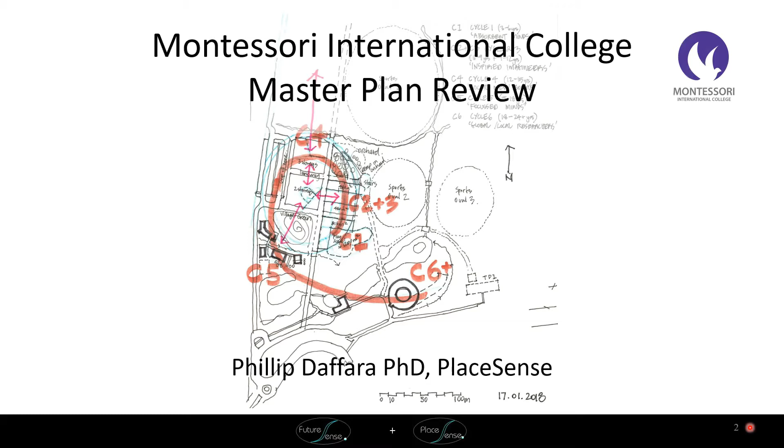The 2012 Campus Master Plan was generated in an organizational culture of survival, as the Montessori International College sought to relocate from its Sippy Downs site and establish a permanent home. This was a time of uncertainty.

Since the opening of the new campus in 2015, the college has experienced strong growth and a shift in organizational culture towards thrival. The 2012 Master Plan has already undergone 3 amendments with the Sunshine Coast Council to respond to short-term drivers of change.

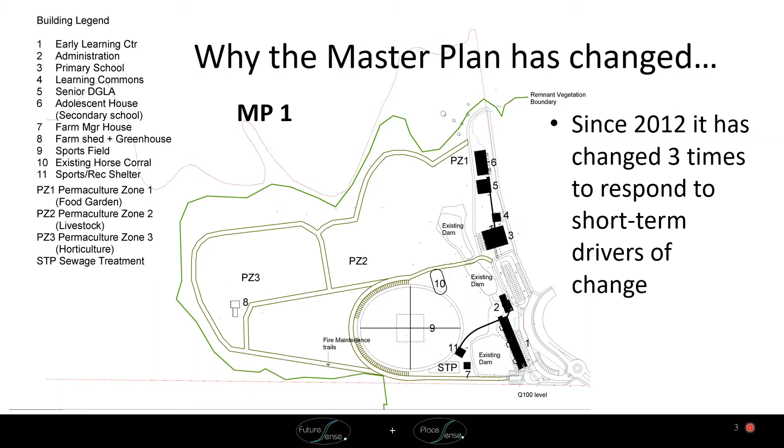Firstly, the plan changed in response to the projected traffic noise and higher than expected noise attenuation standards required by the Department of Transport and Main Roads in the development approval.

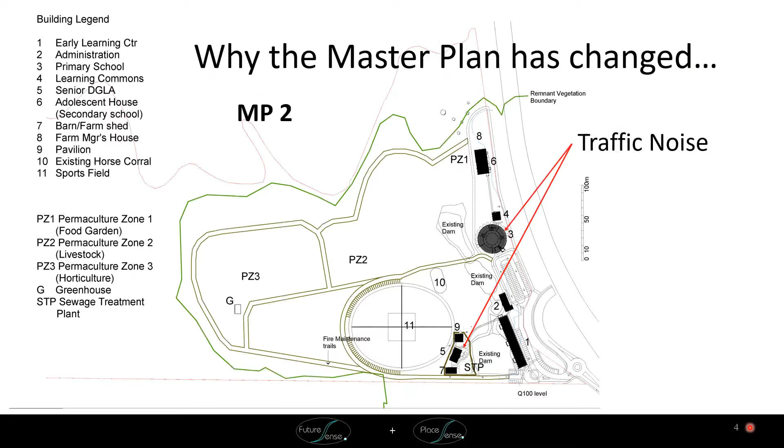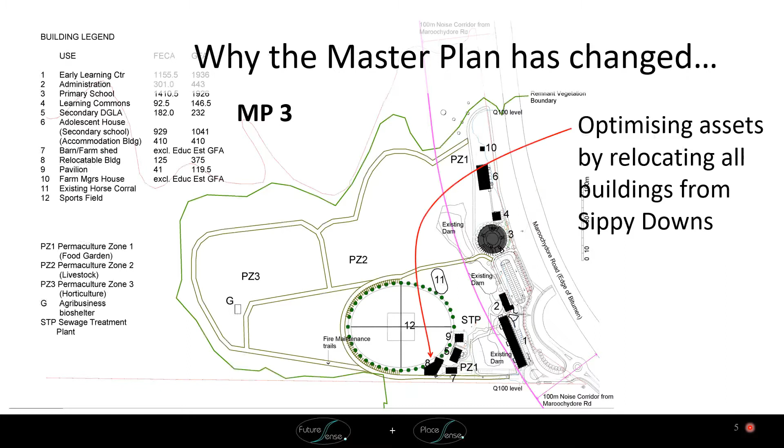Secondly, the plan changed to relocate another building from Sippy Downs, which originally was considered too expensive to shift. Thirdly, the plan changed to recognize the need for temporary demountable buildings to allow growth between permanent building stages.

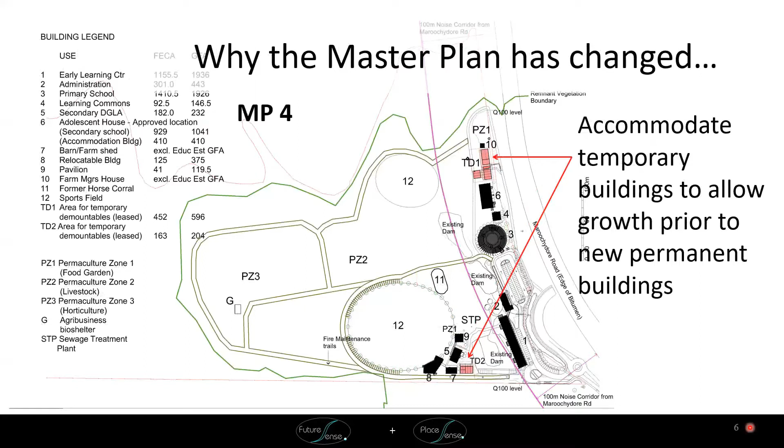The Montessori International College community renewed their vision, mission, and strategic plan in 2017, using visioning and foresight processes to recast their preferred future within the local and global education sector. The emerging vision for the campus is to become a mixed-use village of learners and community impact hub.

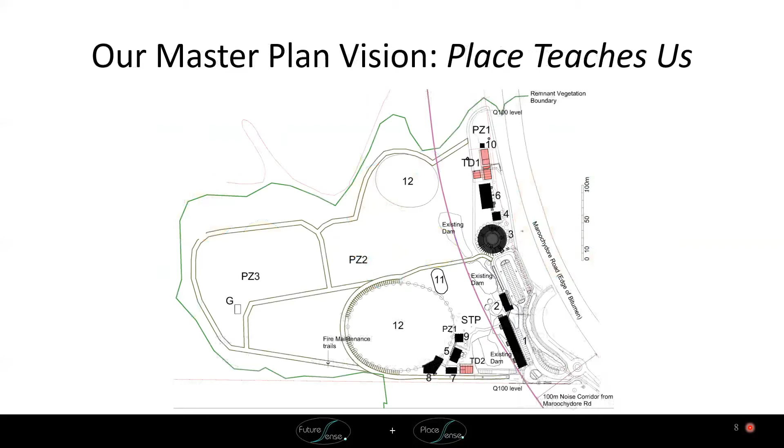As a result of the Futures Visioning workshop on the 27th of May 2017, a number of issues were raised that challenged the current master plan outcomes and what it means for the site. As a recap, here is the current master plan vision and place outcomes.

So our vision is that Montessori environments are beautifully designed and prepared to meet the specific needs of children and adolescents. Our places of learning teach us about the world we live in as we design solutions with nature.

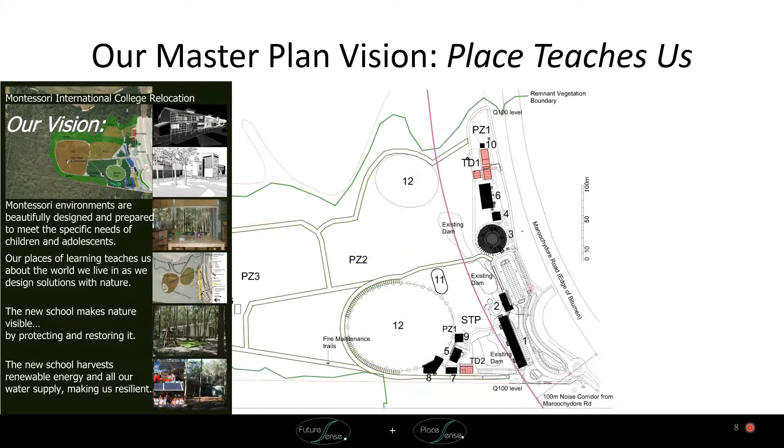The new school makes nature visible by protecting and restoring it. The new school harvests renewable energy and all our water supply, making us resilient. We will reuse buildings, saving materials and energy from Earth's limited resources. We use simple, natural, and healthy building materials.

We will plan and implement smart travel solutions to cut down trips to the school. And the college's adolescent community will manage an organic farm, keeping the land productive.

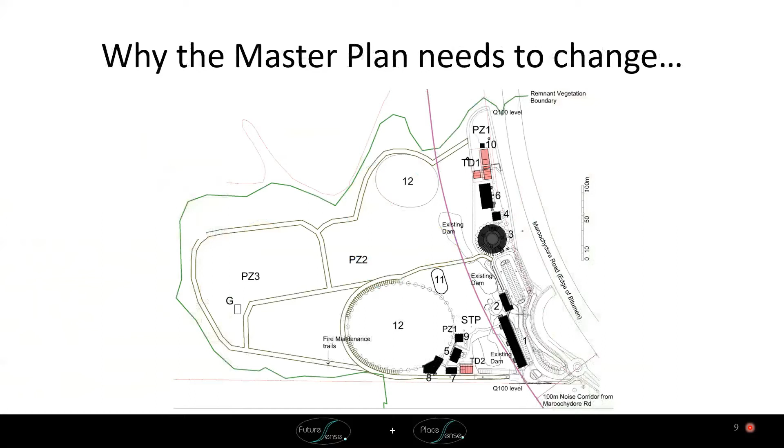A review of the existing master plan is required to ensure long-term strategic alignment between the organizational vision and place vision for the college, and to formulate the long-term design strategies to guide development for the next 20 to 40-year time horizon.

The new place outcomes include being a mixed-use village of learners, being self-sufficient, accommodating population growth, being a robust plan that can have a long life well into the next century, and being able to develop a green school away from the noise, back to the original principles we envisaged.

A small consultant team is reviewing the master plan, consisting of Diane Hayes, Damien McGarry, Ben Heaton, and Philip Daffara, working with Sheree Fitton and Grant Vero from the college executive.

The timeline for amending the master plan began in July 2017 with the generation of 3 development scenarios and the commencement of the issues analysis.

In January, we developed the draft master plan, and now we are sharing the draft master plan with the college community and asking for feedback, before the planning application to Council is lodged to amend the official plan.

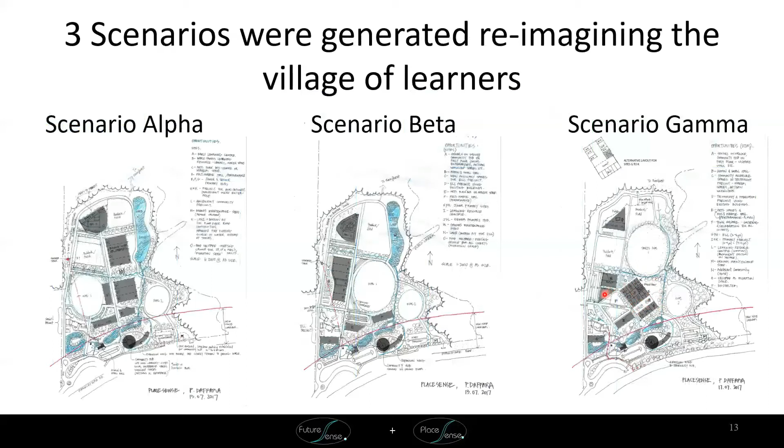The strengths, weaknesses, opportunities and threats analysis helped the consultant team and executive understand the impacts of the development scenarios. This video does not discuss all the impacts, but if you are interested, you may pause and read the SWOT tables for each scenario, or download a PDF of this presentation.

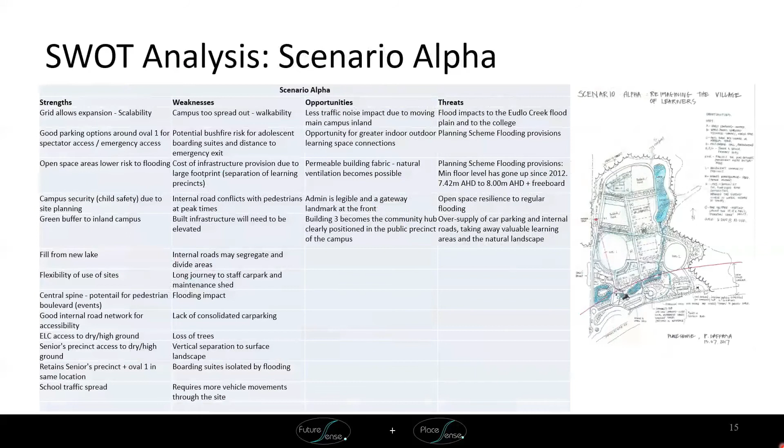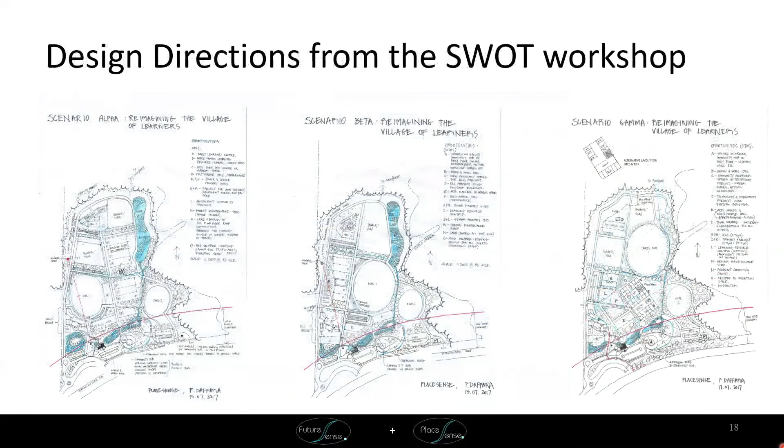The SWOT analysis of the three scenarios identified key development strategies and elements to be embodied in the new master plan.

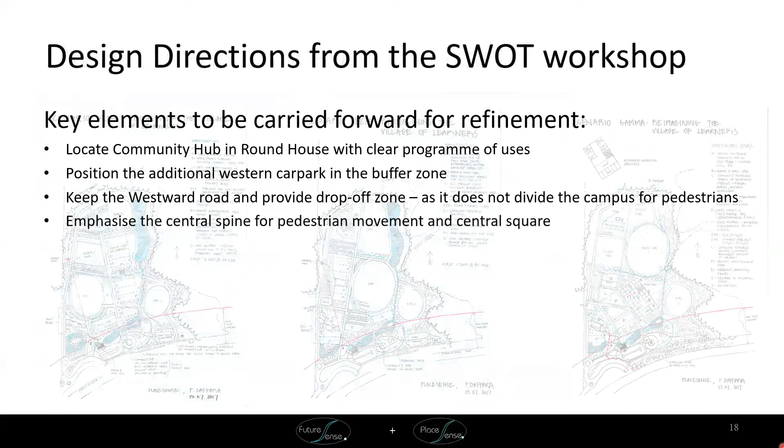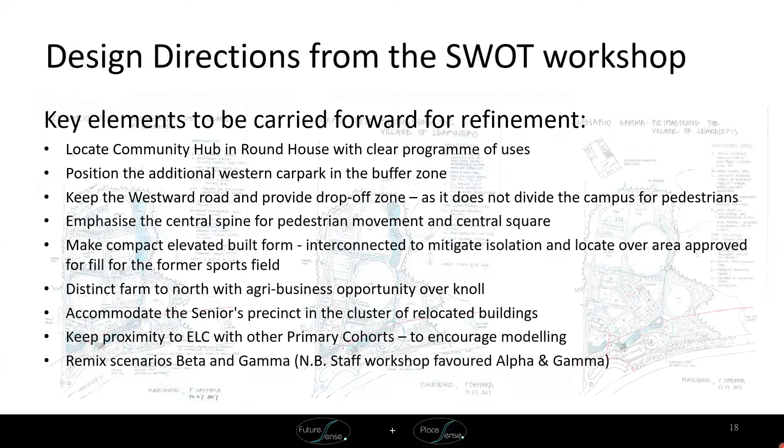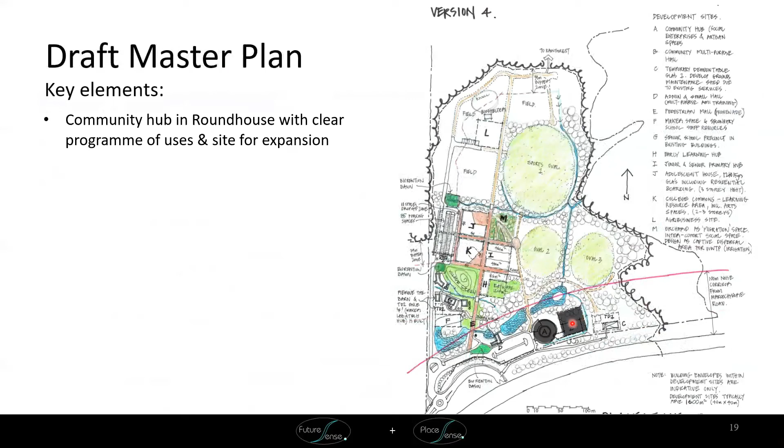So the key elements of the draft master plan include the community hub in the roundhouse with clear program of uses and a site for expansion. A westward road that does not divide the campus and provides a drop-off zone.

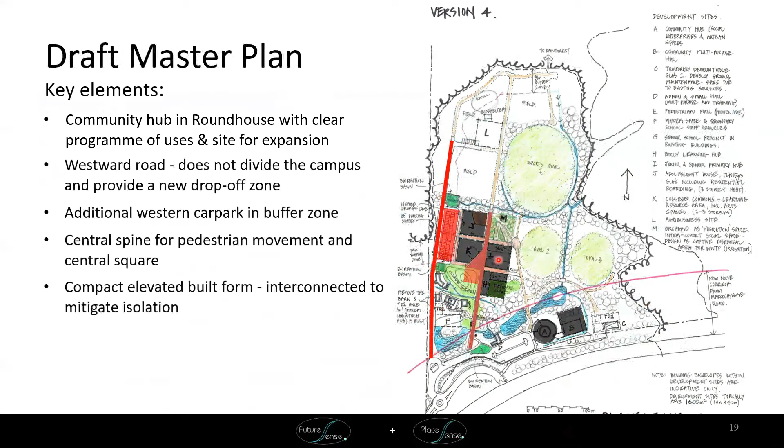Additional western car park in the buffer zone. A central spine for pedestrian movement and a central square and village green. Compact elevated form interconnected to mitigate isolation during flood events. And a distinct farm to the north with agribusiness opportunities over the knoll.

And the seniors precinct is accommodated in the cluster of relocated buildings with an expansion site.

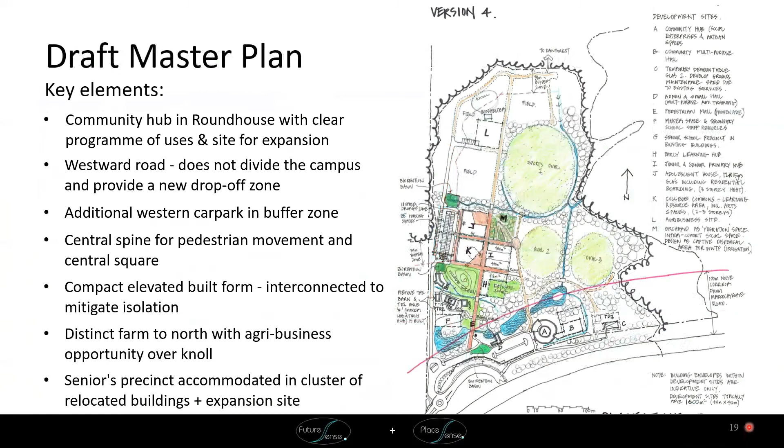The master plan's precincts are inspired by Maria Montessori's evolutionary path of the learner, from early learning to adulthood, with the library at the heart. Cycle 1, the early learning hub for absorbent minds. Cycle 2 and 3, the primary school for inspired Imagineers.

Cycle 4, the adolescent community for social newborns. Cycle 5, the senior school for focused minds. And finally, Cycle 6, the community hub for global, local, lifelong learners.